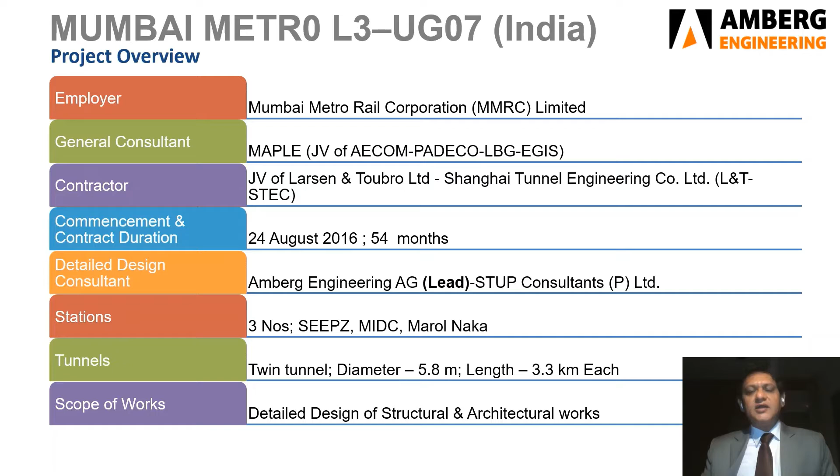Amberg STUP Joint Venture are appointed as detailed design consultants to the project. In this joint venture, Amberg is the lead designer for the project. The project has three stations, namely SEEPZ, MIDC and Marol Naka. The project has a tunnel of about 3.3 kilometers, having a diameter of 5.8 meters. The broad scope of work for Amberg STUP JV was to perform detailed design services for the structural and the architectural works of the project.

Mumbai Metro Line 3 is the 33.5 kilometer long first underground metro line of Mumbai. The estimated cost of the project is $4.3 billion. This metro line will have 26 underground stations and will connect Cuffe Parade in extreme south of the city to SEEPZ in the north central part of Mumbai. The line passes below the most congested and populated places of Mumbai, and that makes this project a very complex one.

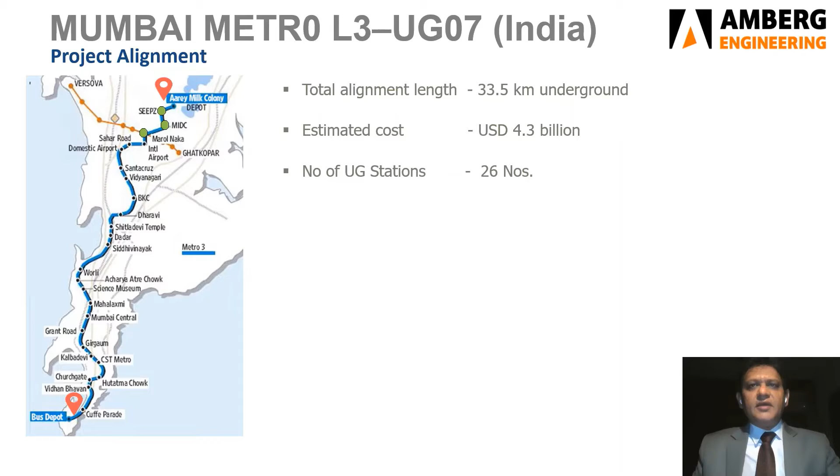The alignment starts from a 75-meter ramp leading to a cut and cover of 130 meters, followed by a bored tunnel section of 515 meters, eventually leading to 225-meter long SEEPZ station, which has been constructed using cut and cover method. Further, a bored tunnel of 967 meters leads us to 255-meter long MIDC station, which has also been constructed using cut and cover method.

Exiting from the MIDC station, an 881-meter bored tunnel leads us to Marol Naka station, which has two cut and cover boxes and platform tunnels using NATM. This stretch has a temporary launch shaft ahead of the Marol Naka station. The last stretch of the alignment is from Marol Naka station in form of a bored tunnel of 781 meters leading to the terminal limit of the package UG07.

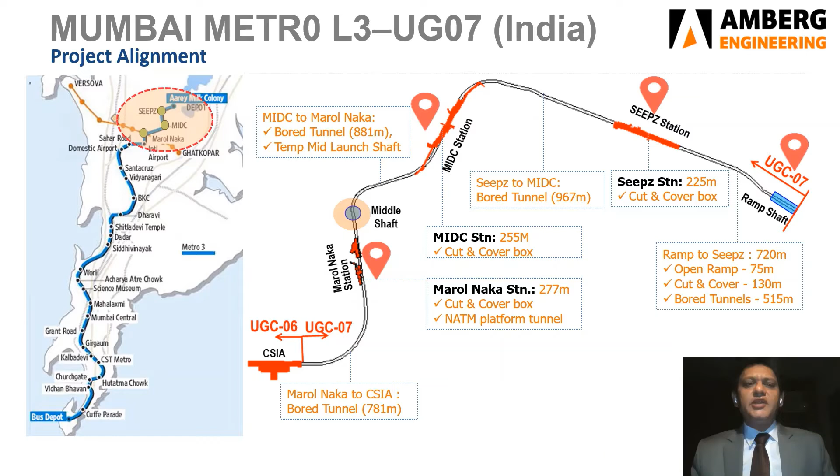All the three stations are constructed adopting bottom-up construction methodology by excavating the station box first and later construction of the station building. Secant piling is adopted for retaining top residual soils and weathered rock, whereas rock bolting and shotcreting with wire mesh is used as primary support measure in rocky conditions.

The geological setup in this area mainly comprises of top residual soils underlain by weathered rock and bedrock. The machines have bored mainly in rocky strata comprising of mixed ground conditions with breccia, basalt and volcanic tuffs of different weathering grades and high groundwater table. As is the case with most projects, this project presented us with some unique design challenges for our design team.

At the Marol Naka station, the line passes underneath an elevated metro line. The bored tunnels here are about 8 meters away from the piled foundation of the elevated line, which is treated as a highly sensitive structure throughout construction of these tunnels. Our engineers designed the tunnels in a manner to safely drive through this stretch.

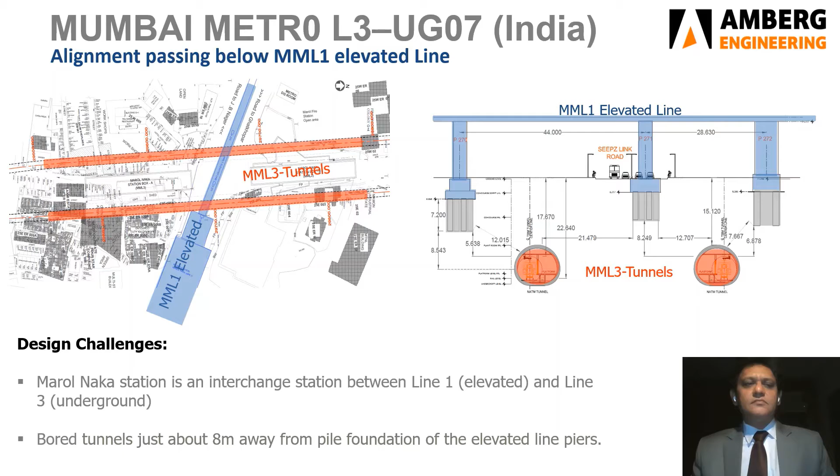Another critical zone was when the bored tunnels had to pass under the multi-story building of JW Marriott Hotel. The overburden cover between the top of the tunnels and the two-level basement of the main hotel building was just 6.6 meters. The tunnels here are designed to be excavated in highly weathered breccia grade 4 rock mass.

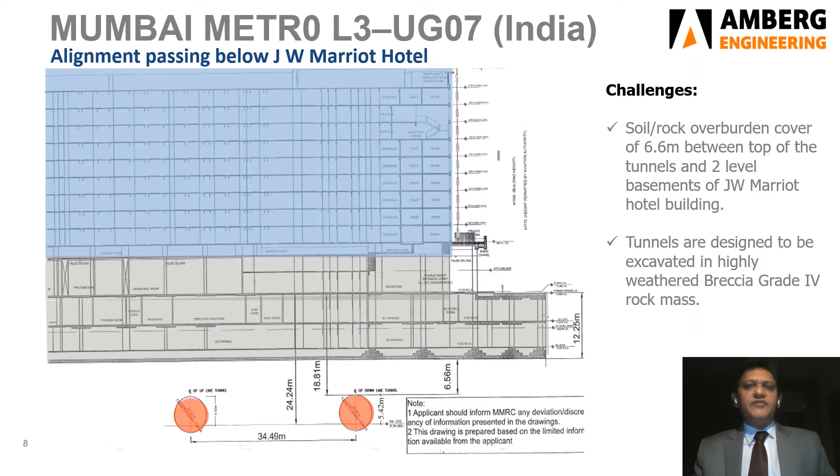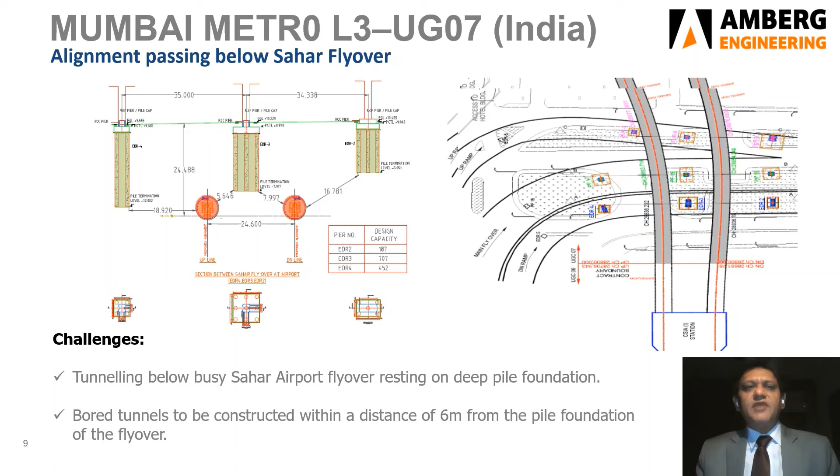The last critical section of this alignment was towards the end of the package near the international airport. The tunnel here passed underneath the Sahar Airport flyover, which was resting on deep pile foundation. Both tunnels here are designed to be constructed within a distance of 6 meters from the pile foundation of this flyover.

Coming to the stations, we would like to elaborate a bit more on Marol Naka station. Due to limited ground space availability at Marol Naka, the station platforms are constructed by enlarging a 250-meter long stretch of the bore tunnels running parallel on either side of the station box. After completion, the bore tunnels were enlarged to a 12-meter wide platform tunnel using NATM.

Pre-consolidation grouting was carried out to consolidate and restrict the water ingress. Platform tunnels are supported using shotcrete, wire mesh, systemic bolting, and lattice girders as primary support, followed by final RCC lining, considering a project life of 120 years. Platform tunnels are connected with the station box by 16 connecting tunnels. Out of these, 12 will be for public access and 4 will be used for other services.

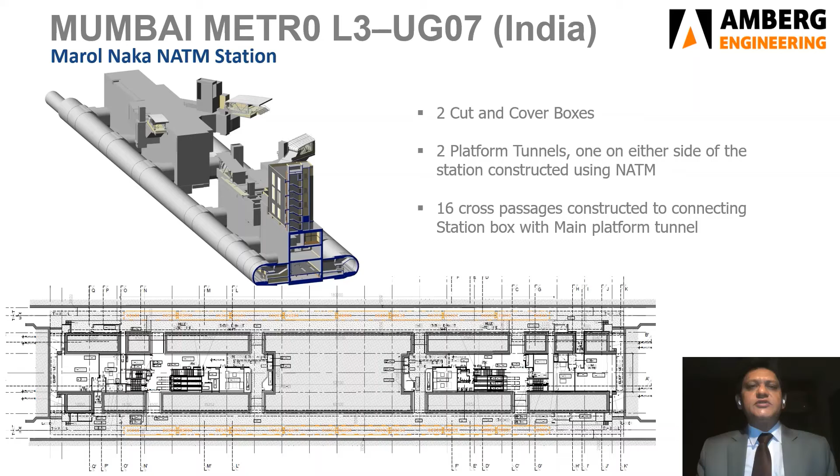This station came with its own set of challenges. The platform tunnels were to be constructed with an operational Mumbai Metro line crossing perpendicular to the platform tunnel alignment. This location at Marol Naka is one of the busiest road junctions and has various major utilities below the ground surface. Cover between the main platform tunnel and the station box is only 4.5 meters.

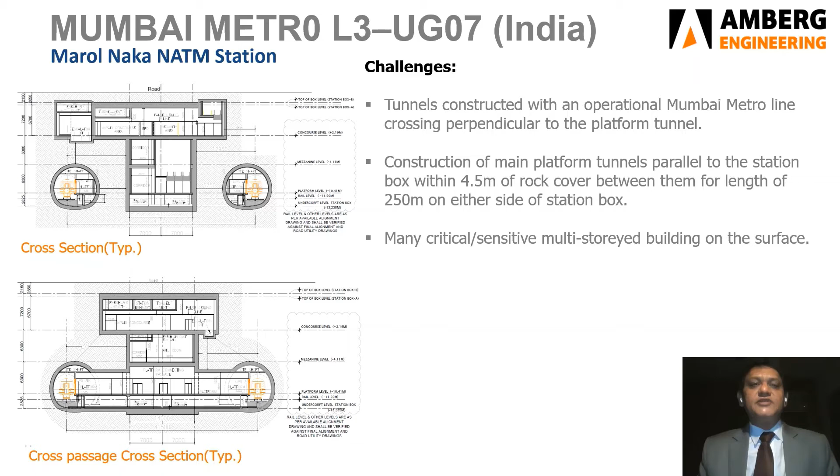The main platform tunnels are designed to be constructed parallel to the station box within 4.5 meters of rock cover for a length of 250 meters on either side of the station box, with many critical sensitive multi-story buildings on the surface. Now I would like you to have a look at some of the pictures from the construction stage of the project.

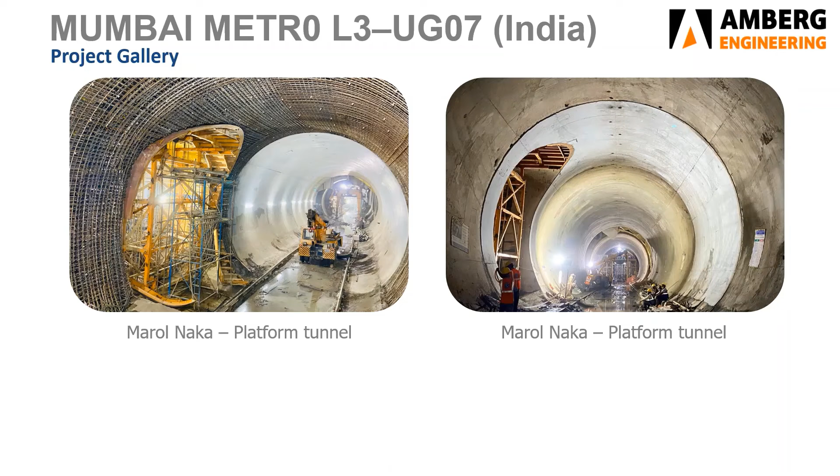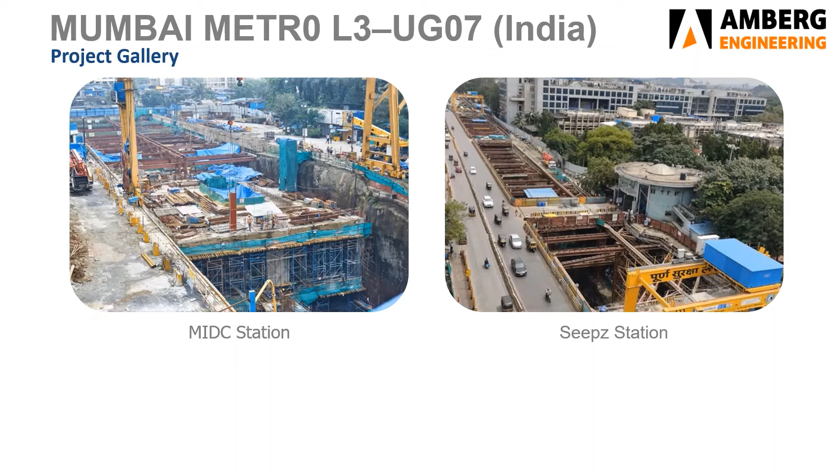This project is our signature project here in India. We take pride in this assignment and we look forward every day to create more value for our clients through better services. Thanks for your time and attention.

Hi, Jairam here, Project Director of L&T-STEC JV, Package 7, Mumbai Underground Metro Line 3. The project comprises 3 underground stations and associated bore tunnels of around 7.5 kilometer length, including a NATM station. We appointed Amberg Stup JV as a detailed design consultant for the development of structural and architectural designs. Amberg showed their proven credentials by deputing experienced designers at site and also at back office to give seamless support for the design and development and early approvals.